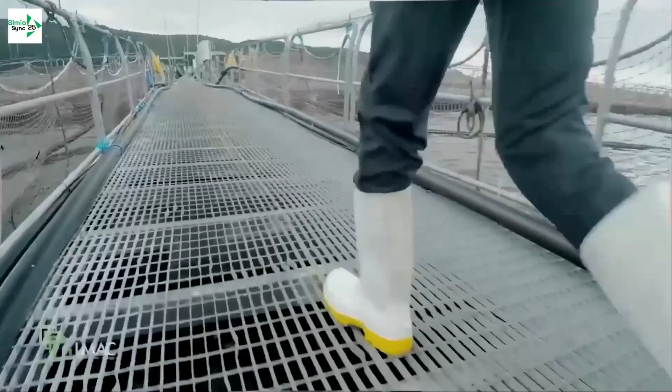Since we started the business in 2005, we've grown and we've now got consultants based in various locations across both North and South Island, supporting businesses anywhere from 10 employees to over 3,000 employees. We could be in a boardroom one day, out on a salmon farm the next, a milking shed the day after, and in a lab working with all sorts of people the day after that. The diversity is what makes this job so interesting for us.

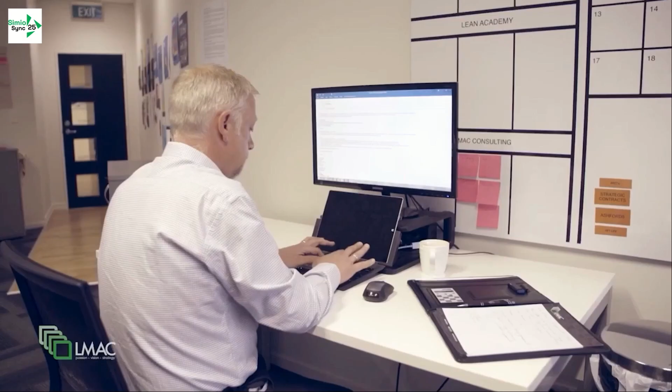We are a New Zealand owned and operated company. As we've grown through reputation, we're now operating on 3 continents. That includes China through the Asia Pacific, and we've gone as far as the UK and Europe, the Philippines. Having now 10 consultants in the field across New Zealand, we've got real capability to service larger organisations.

So I was up in Nelson yesterday doing some work in a lab. We're just about to head out to the salmon farm in Stewart Island, so pretty much as far south as you can get. Next stop Antarctica, I guess.

The rewards come when you see what you're doing make a difference for the people that you're working with. It's awesome, it's amazing, that's why I do it.

Oh yeah, definitely rather work smarter than harder. If there's an easier way to do it, I want to know about it.

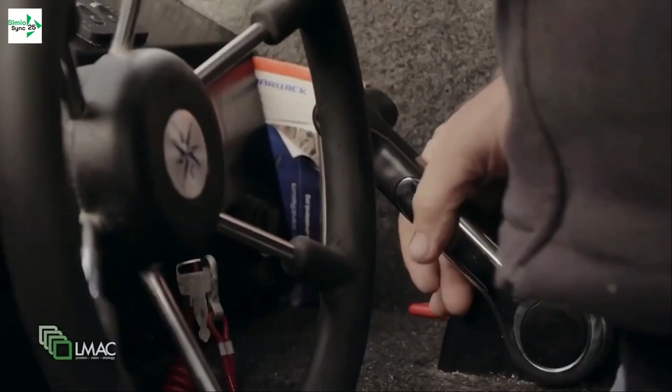Our desire is to help our clients succeed. We don't believe in doing lean tools to people. What we're actually doing is helping organisations use lean strategically to help them achieve real business objectives and to take them closer to their vision.

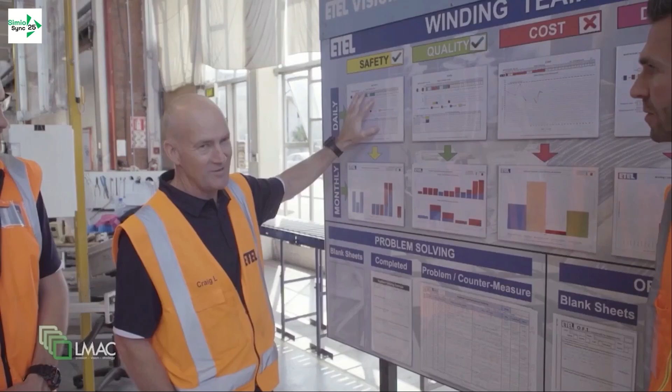So for us this all starts with having a clear strategic plan. And if we've got a clear strategic plan, then we can pick the appropriate tools in which we can deploy in order to help them achieve their objectives. So most organisations have got a high level vision of where they want to be in a number of years, and where we're helping these organisations is actually turn that vision into a strategy that will get them there.

Lean tools are just that, they're just tools. The trick is to make them relevant to the people using them. If we do that, we're going to make the jobs easier, not harder. And really that's the trick to sustaining improvement.

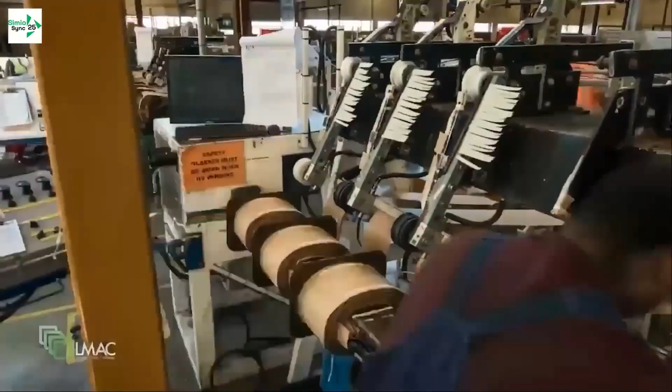LMAC work with organisations across a broad spectrum of industries. We've covered a lot in the primary industry, and of course we cover processing in all different shapes and forms. So that might be FMCG, it might be low volume manufacturing, it might be high volume electronics. We're working in the service industry as well.

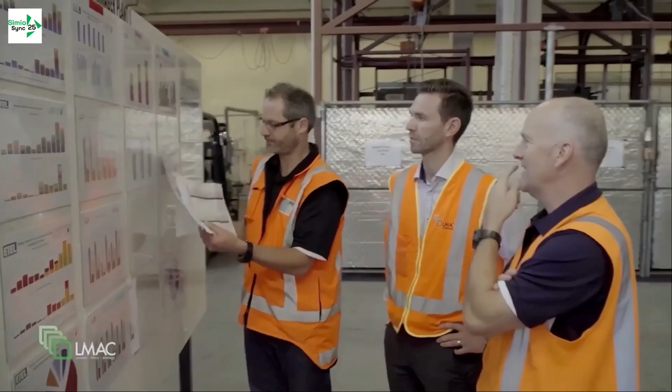When we achieve levels of efficiencies that we do, when that allows us to bring manufacturing back on shore, then that's really, really rewarding. And we know with the right approach, we can turn around any organisation. We never say it's going to be easy, but we know it can be done.

We feel strongly that we're actually making a difference in New Zealand as a team. We're able to prevent some businesses going under. That's something real for us. That for me is what drives me, is success. This is part of the passion. We know that we can revolutionise an industry, not just an organisation.

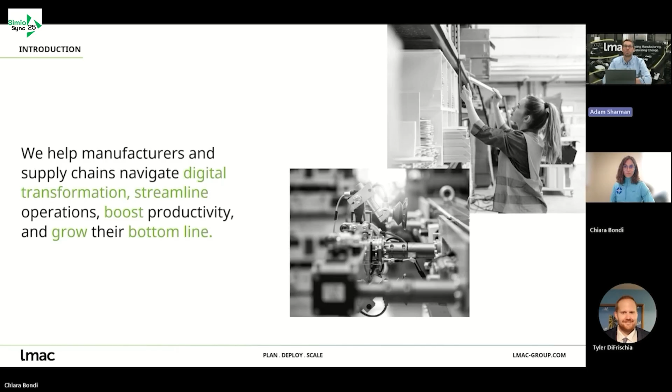Recognizing that if we can create high productivity in manufacturers, then we can keep really high quality jobs in the regions that we work with, and support communities as they rally around those manufacturers and the employment they provide. So we started out really with Lean and the Toyota way, looking at productivity in terms of process efficiency, operational effectiveness, and culture. And we've expanded that out now to bring in some other elements of high performance manufacturing.

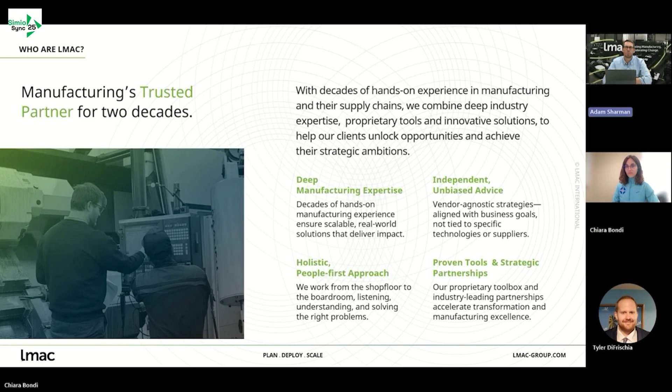We pride ourselves on being independent, so we don't have commercial relationships with any software vendors in terms of deployment or recommendation into clients. Our job is really to help organizations understand their own strategy, the transformation they need to go through to achieve that strategy, and then provide independent advice based on what software, what automation, what kind of markets even they should be entering, from our perspective of having deep manufacturing expertise. All of our people have grown up through manufacturing and led manufacturing floors, and now they're working on our side to support organizations with that transformation to high productivity.

So this is how we work. We support organizations in three areas. The first is to define their strategy. In some cases, that might be taking the organization strategy and developing out what that means in terms of operations and technology, what the operation needs to look like to support the future state organization ambition, what kind of throughput they're going to need, what kind of performance they're going to need, and building out the roadmap that's going to take them on that journey.

We then support that through optimization of current state and optimization of process. This is what you can think of in the more traditional sense of Lean or the Toyota Production System and Six Sigma. We bring in elements of all of those methodologies to make sure the operation itself is working as efficiently as possible in its current state.

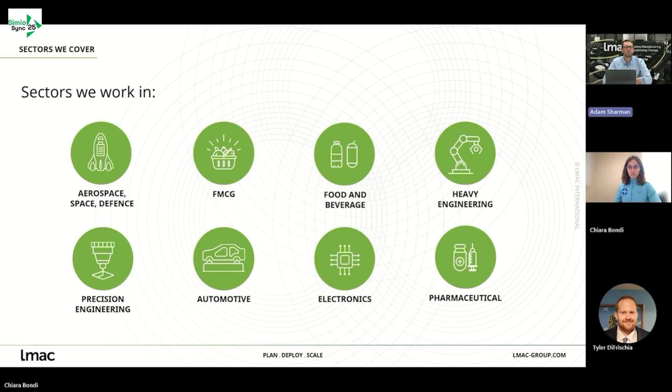As I said, we were founded in New Zealand. I'm actually based in New Zealand, but I work across New Zealand and Australia, so that's the region that I run across APAC. But we've got a team in the UK as well that works across Europe, and we've done work across some of Asia as well, really expanding out from that New Zealand region.

So just to introduce the project that we'll be demonstrating today, I've called out this project specifically because I think it's a really good example of how we can use simulation, not just for this specific project, but actually as a repeatable process for a lot of clients, because the goals that this client was looking for are often what we find when we go in and work with organizations, and you'll see that play through in the model. This organization is based in New Zealand.

They specialize in metalwork, so engineering, fabrication, and production of metal products. They've developed their own product, which is going into market. It's been in pilot form up to now. And this proprietary product essentially takes some metal components that they produce themselves, so you'll see laser cutting, you'll see folding, you'll see assembly.

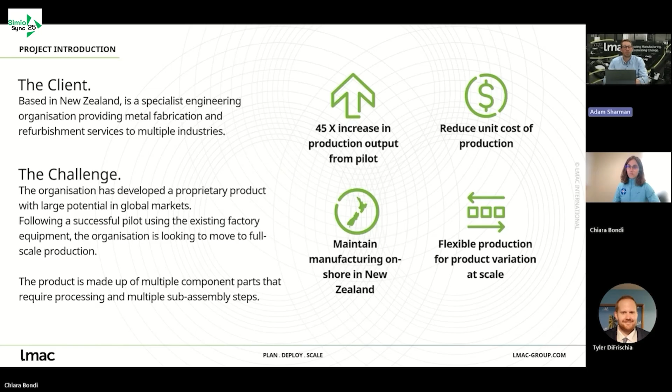Okay, next slide please. So in order to do that, there were a few key questions that we needed to answer with the client, and this is really where the simulation comes in. The first key question was, what's the potential production capacity of the current factory? So if we were to combine all of the machines together in an efficient line, would we be able to meet the scale requirements of that 26,000 units?

Secondly, if not, then what are the constraints and how do we identify what those constraints are given the current setup? So you'll see some experiments in here that we looked at to see if we could optimize that current setup to try and remove some of those constraints. And that's where the simulation was really powerful in being able to look at those things without having to actually change the facility in any way before we actually started to make some of those decisions.

So we've looked at what are those ways that we can mitigate those constraints, either by putting more people on, running different shift patterns, potentially even automation, and we can play with that in the simulation as well.

And then finally, if we have worked out how we can mitigate those constraints, which might be running multiple shifts or 24/7 production, it might be automation, it might be a whole new line, then we can develop the future state in the simulation tool. And more importantly, we can cost that out.

So the client has a really strong view of what the ROI is of their future investment. If they need to invest in new machinery, for example, or a new facility, we can make really good, data-driven decisions on that before actually committing to that capital outlay.

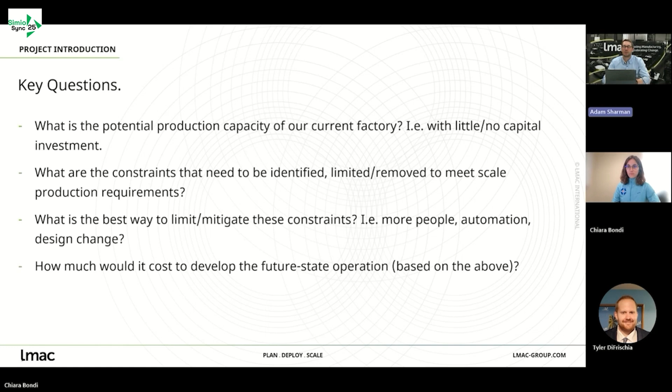And these are common challenges that we find. So this is a really good case study that would be replicated across multiple clients, particularly those that are looking to optimize their current state, but probably more importantly for those that are looking at building a future state, either because they've got growth ambition, or they need to meet demand in some way, or because they've got a new market or a new product that they actually need to build a whole new line for. So this is why it's such a good case study.

So this is the approach we took, and it's been fantastic to partner with Simio. We've been partnering together for about a year on this project, and it's been a really great relationship because we've been able to develop the model to its current state.

Before engaging with Simio, we had mapped out the process flow on a design software, which gave us the process steps, and we'd done all of the data capture around things like machine time and setup time, so that they were good inputs into the model.

We partnered with Simio to build the current state model, which is what you'll see today, and then use that model to create experiments to build out production scenarios using that current state to answer those first two questions: what's our potential in the current setup, and what could we play with to optimize that current setup without major capital investment. So what you're going to see today is those first two steps.

The next step from here, and we're working with the client on this at the moment, is to get into step 3, which is really to design that future state factory. That's looking at the production line itself, but also the 3D rendering of that model so that we can look at not just process flow, but also labor flow, forklift flow, space and material flow, so that we can actually present something to the client and they know what size facility they need, what machine setup they need, and crucially, how the layout would work and how the flow would work.

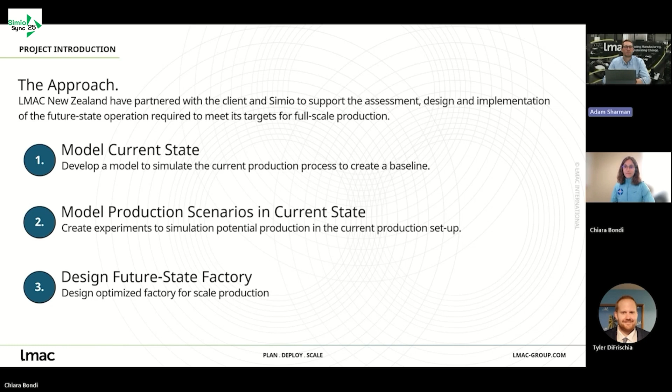So what you're going to see today is steps 1 and 2, but just note that step 3 is going to be built on top of this. So I think with that, I'll hand over to you, Chiara.

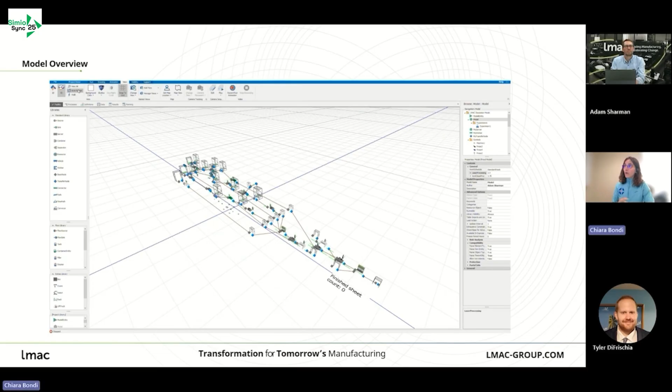Right here, we can see a brief video of what everything looks like when we modeled it. We wanted to simulate the entire flow of the product from start to finish and all of its middle areas, including storage areas, the racks, and specifically the behavior of the workers trying to move the product from every station over to their storage area, where then they could be picked up maybe from another worker or another resource, moved along, and then continue down the line to complete all of their operations.

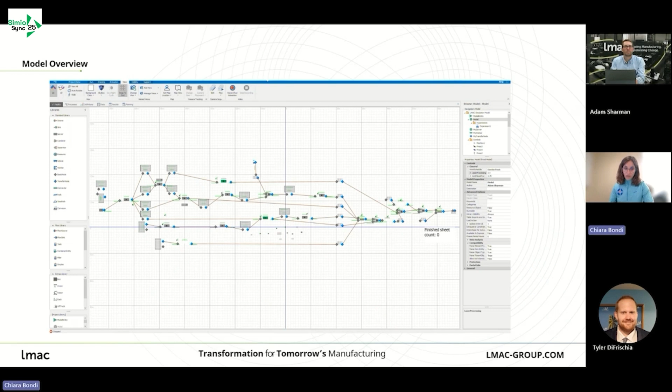And so when we jump into the model and we continue our conversation, we're really going to start by looking at what are we trying to model? What are we currently looking at? What are we trying to simulate in all of these different stages? And then how do we use this in those future states or in those potential scenarios?

Just like Adam discussed, we've already been implementing some experiments to start and look at what could we change in the current system without modifying machinery, without modifying layouts, etc. And what are these changes improving, or potentially giving us new ideas for how to modify the functioning of this facility in the future. And we'll dive into the model.

We'll actually look at the model inside of the Simio software itself and discuss sort of the key components of it, how everything flows, and then focus on a couple areas that were our main goal throughout our modeling endeavor.

Kind of the more interesting or intricate pieces of the model, specifically understanding the worker requirements and understanding how do we properly allocate our workers to understand where they need to complete tasks and what to prioritize, as well as the behavior of the storage and retrieval from the racks, understanding how is that being timed, who is picking from what, how much is going into each rack, and how much is getting picked from each rack, etc.

And so we'll discuss how we've been able to model all of these, both at the beginning and then how all of that potentially changed or improved as we learned more of both the behavior of the facility at the customer side, but also as we started to navigate better the software, understanding what the best options were for higher levels of flexibility, etc.

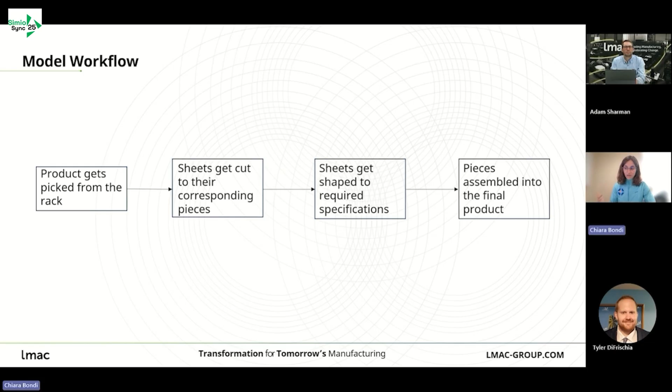But with that being said, let's actually look at the model inside the software and dive into all the different pieces accordingly.

And so here's the model. Let me go ahead and start the model run. As you can see, we have all of our different areas, both from the start on the left-hand side of the screen, where our product gets picked from the racks, and then moved all the way downstream by workers, where not only are they transporting material, but they might also be required at the machinery to complete specific operations.

We can go ahead and start seeing, at the front end, these workers completing these specific tasks or bringing material back and forth. Some of them might be bringing it over in batches, other times individually. Then when we go all the way to the back end, once these racks get filled up with material, we'll have to pick them and then go into their final assembly.

So it's a matter of understanding how everything flows, what the storage capabilities are, and especially when we reach this back end or downstream of the line, how do we pick the product from the racks? How do we ensure we're getting all the required materials, and the timing of it especially?

There were definitely a lot of different components that went into understanding and discussing the overall functioning and behavior of, specifically, for example, the workers. As we mentioned, the workers are going to be required not just for transportation purposes but also for seizing and work. So what was important at the beginning was understanding how we're going to model the capabilities of transporting batches versus individual products, and how we prioritize potentially the transport requests of some locations versus others. Then, understanding how do we even model the racks, and what were the different stages of this overall flow?

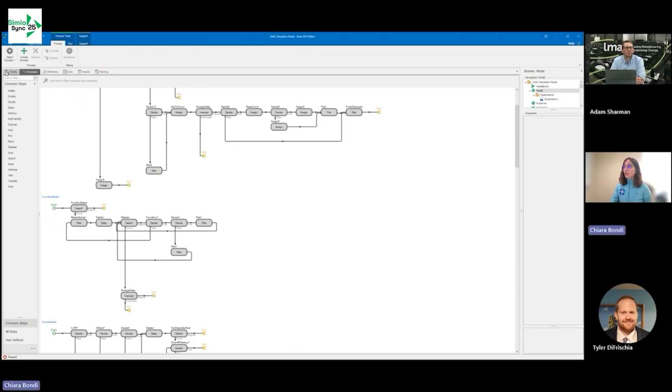And thanks to these loops, and the use of data - storing the information of all of the different racks, all of the different locations, where everything is connected to - we've been able to create this one single loop that can look through those tables and release the products needed accordingly. So what that looks like, for example, is through tables we were able to connect these two racks to this one machine.

So whenever we have a product finishing at this machine, we'd be able to notify these racks that they're able now to release one of those products and call the worker over to pick that product and bring it over.

And so that was our first big component of this model, that big hurdle we had to get over - how do we model the actual rack behavior? The next piece was, when we started, we had no workers, because again, we want to layer all of these different pieces together. That's really how we want to get to these larger projects and these larger models - by adding layer by layer. We start with the foundation, then we add the walls, and finish with the ceiling.

So when we first started, we had no workers - we just had the product flowing through free space or through our paths without any other requirements. But obviously that next part, which is going to be really important for analysis, is understanding what are our workers doing - are our workers being efficient? Are we able to utilize them for transport as well as for any manual operations required for any of our machinery?

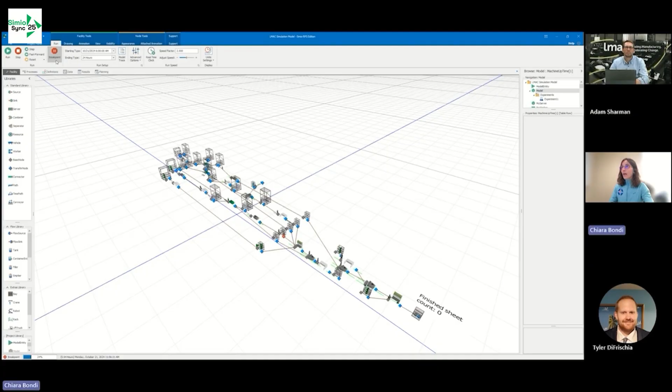And especially down here, when they reach the racks and reaching these outputs—so if I put, just to have us look at this a little bit in the far end of the simulation, when we reach those points at the bottom, you'll start to see how everything downstream works to be able to move the product. And so we already have pieces that are waiting.

We might have others that are waiting to keep on going, and we have workers and other products. We can see, for example, that some are already present inside of or at our station to begin those assembly steps. But we're also waiting now beforehand for product to come from this rack, so we're still waiting for some of those pieces.

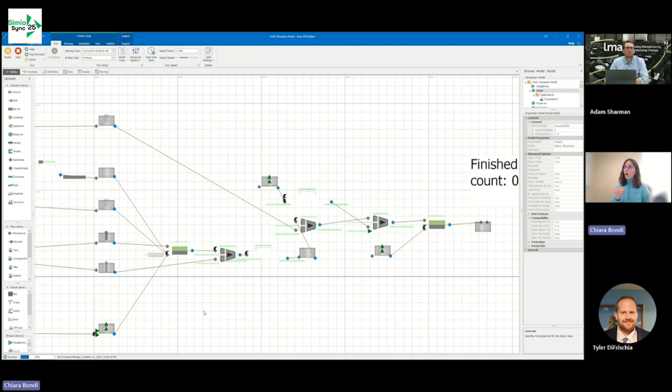Once we were able to model that worker behavior and understand how they're prioritizing these different tasks and how they're moving downstream to the assembly, we were able to complete all of our operations. Fast forwarding to the end of the model run, we get a sense of how many products we're assembling and how we're finishing.

If we continue the simulation, we'll start to see, even if I pause right now, some of the product getting completed. If I just run the simulation, we'll see more products getting completed, waiting to be moved in batches, and then ultimately being stored in the finishing area.

In the current state, what we're really using to measure the behavior and outcome of this model is the finished count of products, so we can say, okay, if the expected number of finished products for the given time frame, say 24 hours, is 600, what can we do to increase that? That's the experiment side, but we're also using it to validate: are we actually producing the 600 expected during the time frame we've looked at?

And then from there, what can we do to improve? Currently, what we're using to gauge the model's behavior and improvement is that finished count. But as we progress, as Adam mentioned, we're going to be looking at other pieces as well, such as finances involved, costs associated, etc. So we can start to see all of that.

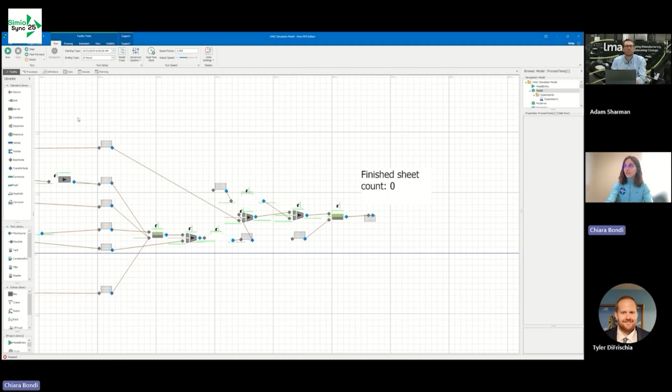In this model, we've already begun experimenting with different options. For example, going back to our workers, we have them working following a specific worker schedule with set hours and breaks. But one question became: what happens if we actually implement different schedules? What happens if we modify some of these schedules for our different workers?

If I go into the properties, we can see one of our controls is actually our schedule. Do we want to implement a standard sort of shift of a standard week, or do we want to implement maybe a second shift where we have workers working an AM and a PM shift? And if we start doing that, what are the impacts? We've already been able to see some improvement when testing these different schedules.

Other options are, for example, testing the machinery. We've added flexibility to all of these different pieces of equipment thanks to using data to connect to the specific processing times and capacities. We are currently processing one sheet at a time, but what happens if we add a piece of equipment so we can do 2 or 3 sheets simultaneously?

Will that improve everything? Or are bottlenecks maybe a storage question for all of our racks? Are our racks not at capacity? And if so, do we need to add more storage, or just modify how we're picking and choosing from these different locations?

It's been really great to see the model progress from where we started with all servers, to developing racks, to adding that process logic, to adding those workers, and really seeing those different layers. But it's also been absolutely amazing to walk Adam through and help him with the development of this, and have him continue taking these experiments, playing around with the different pieces, and start to really visualize what's happening and what we want to showcase, and how we want to move forward with our experiments and this project.

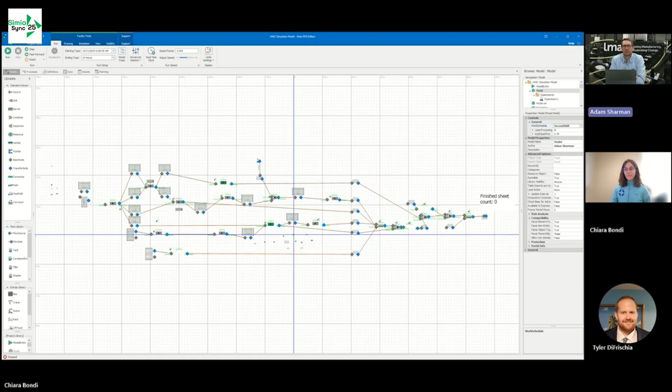No, I just want to reiterate the partnership, really. It has been about a year now, and it's so funny to look back at the model now. On the face of it, it looks quite simple when we just look at it like this, but there's so much logic that sits underneath it that it's been amazing to develop. A lot of that logic is in terms of workers, in terms of racks, in terms of that first server, because that first server takes one piece in and produces multiple pieces out, alternating between certain material types based on some logic sitting underneath it. So again, it's something that looks relatively simple, but the logic underneath it is actually quite complicated.

But it's really given us a foundation to be able to take this to other clients as well, because a lot of these challenges we're talking about are very common in manufacturing in terms of things like picking from racks, what to pick when, which workers to allocate to that, how to model material flow. So it's something we'll be using quite a lot, using this as a base and the model logic that sits underneath it.

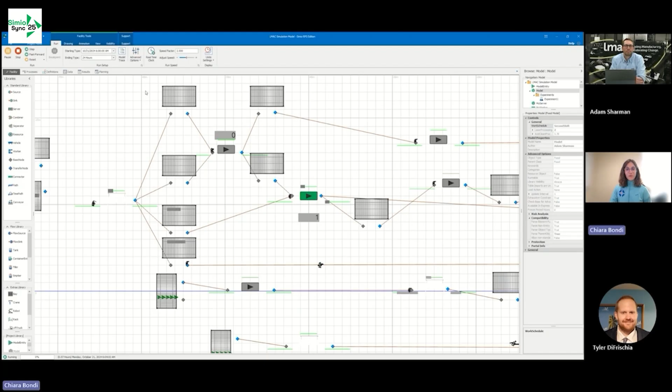Thank you for the great work. I'm excited to see that we could showcase another collaboration between Simio and one of our customers. I really enjoyed the presentation, and we'll get into some of the audience questions. First on the screen: how clear were the goals and scope as stated by the customer, and how much did you have to coach them through developing scope of work?

Yeah, it's a great question. The customer themselves were very clear on their end game, but I suppose the coaching part came in stepping through the process. A lot of the work we do is looking at what part of a line to automate or how to automate complete lines. But you can only really do that if you know the current state, so that what you're automating and the capacity that you've got, and therefore the ROI on it, makes sense. You might automate one part of a line, but actually that wasn't the constraint in the first place. The constraint is somewhere else. So that's a waste of money, essentially. You're essentially automating waste at that point.